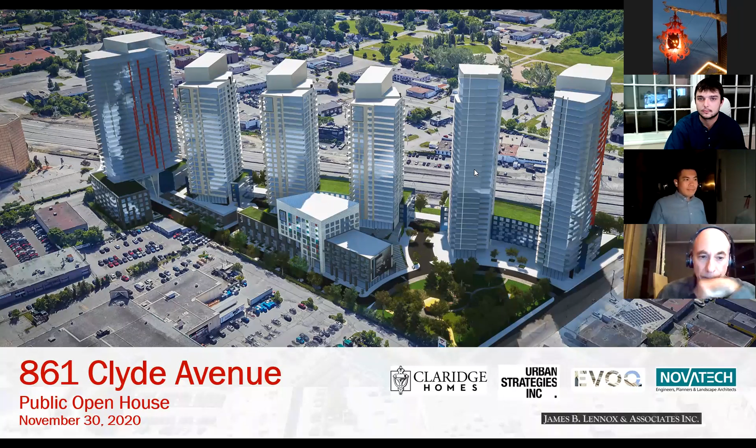Okay, I'll pick it up from there. Good evening, everyone, thanks for joining us tonight. I see about 52 participants, which is actually a great turnout for a meeting like this. We're talking about a site that's a little out of the way from where most people are living in Ottawa, so it's good people are interested to see what's being proposed for this pocket of the city, which to us from a planning perspective is really quite interesting.

It's a part of the city where we see quite a bit of change occurring over the coming decades. We think this project is going to be the first of many, and it's a bold plan for what we think is a pretty exciting, clearly a high-rise neighborhood. We're going to explain it to you in detail, but I want to spend a little time setting the context before a more detailed description by Nathan, the project architect.

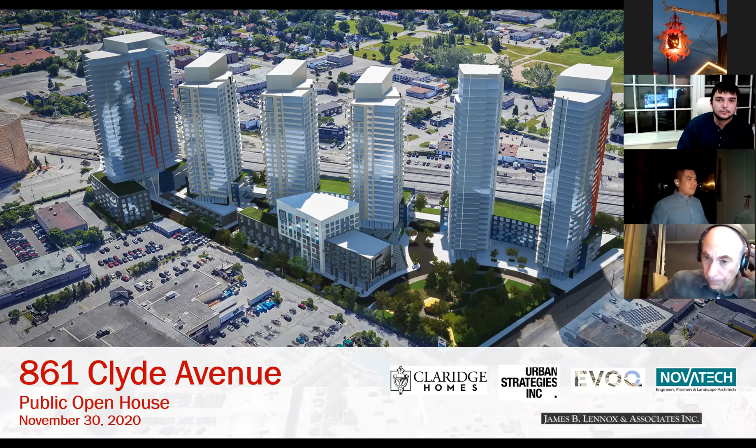Next slide, Barton. Here it comes. Just the agenda, and we need to correct this a little bit. We've already done the introductions and welcoming remarks from the councillor. So we're going to spend about 25 minutes taking you through the project, and then up to maybe an hour if you've got that many questions for us. We're booked for a full hour and a half tonight, so we'll stick around for at least that amount of time if there are that many questions and comments. So let's keep going with the presentation.

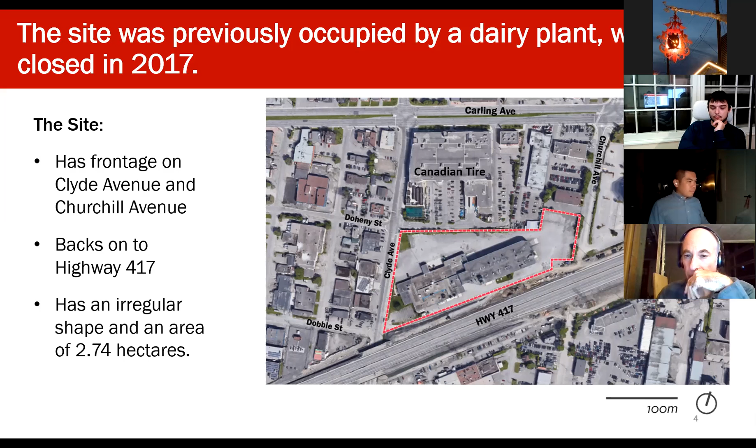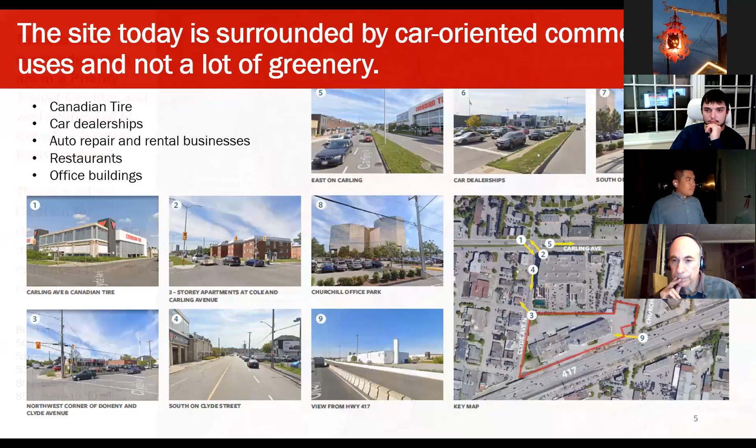On the north side of 417, we've got a whole mix of things going on. It's obviously the Canadian Tire and the office building I mentioned, a number of other car-oriented commercial uses, particularly on the west side of Clyde Avenue.

These are functioning businesses today that likely over time, with the ongoing growth of the city, a lot of that growth tended to happen through intensification. And Carling Avenue being such an important transit corridor in the city, we certainly see the area, our site and the area around it evolving and intensifying with redevelopment over time to become really an interesting, more transit-focused neighborhood within the sort of area that's really very well-established low-rise communities.

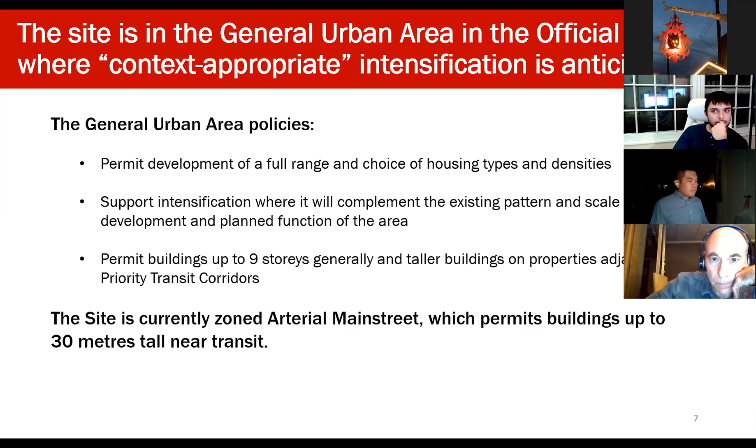The intensification proposed on the site is going to create a self-contained neighborhood that will set the stage for broader renewal on the surrounding lands, which will over time support even better transit on Carling Avenue and a better transit network overall, as well as bringing amenities that benefit the larger area.

So with that bit of setup on the policy side, let's move into describing our proposed master plan. This is a significant development, one that will build out over phases, and Nathan will describe those phases to you over many years.

It's a 6-tower development with additional mid-rise buildings. You might think it's all apartment buildings, but in fact, as Nathan will describe, it also includes some town housing development, and very importantly, significant open space improvements in the neighborhood.

A new neighborhood park right on Clyde Avenue will give the development an address and provide an amenity and gathering point for what we see as becoming a larger neighborhood over time. As well, a linear open space up against the 417.

We are required to set back our development from the 417 by 14 meters, so we thought it was a great opportunity to use that as a usable open space to provide a trail connection through there. It could be publicly accessible.

Nathan will take you through this in more detail, but we do have some interesting amenity spaces for the people that will be living in this community. With that overview, I'm going to turn it over to Nathan to go into more detail about the project.

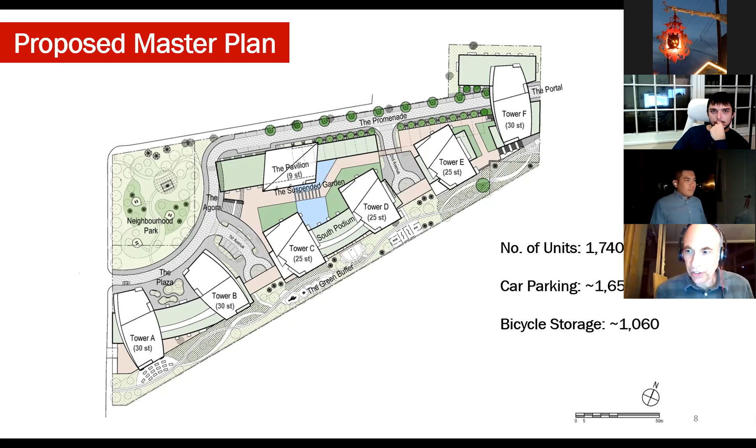Thanks, Tim. Yeah, this is the first I've spoken tonight, so can everyone hear me? Can someone just say yes or no? Yes. Okay, thank you.

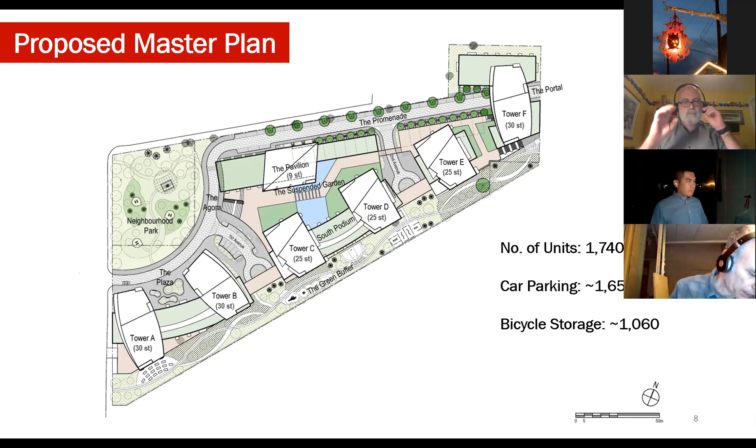There are several unifying elements that pull this whole project together. The first is the neighborhood park, which we positioned at the northwest corner of the site. The location was strategic, easily accessed by all residents of the neighborhood, this project and future neighborhoods, and it will allow the park to expand north if there are further developments.

The location of the park allows it, which is dedicated to the city as public park land, to offer a stage around which the entire project is developed and experienced. It becomes a main pedestrian access point, a focus of public open space, and it generates the orientation and form of the surrounding buildings. We've tried to use this park and the surrounding buildings to create a civic space that becomes the main gateway to this project.

The second unifying element that ties the project from east to west is what I refer to on this drawing as the promenade, the internal street that provides access to all the buildings. At the same time it offers natural connectivity with future developments. As we saw in Tim's diagram, the way the promenade is placed will provide good future access to future projects from the center of this very long block. It offers a movement and access spine for the entire project.

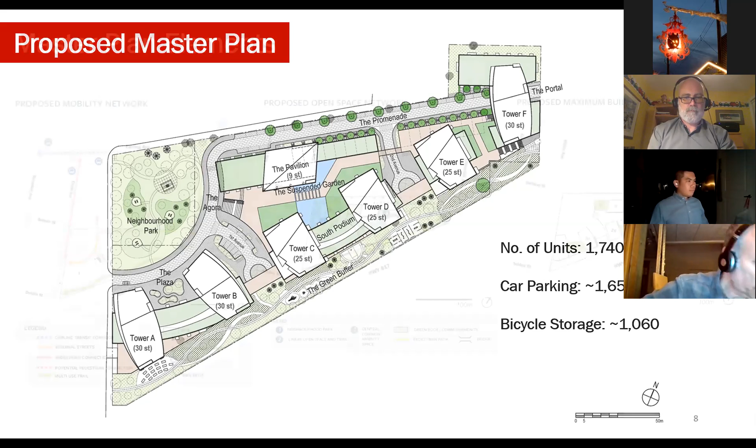It offers diverse experiences, grade level amenities and commercial spaces off it. We'll see in future slides that residential entrances, including townhomes and tower lobbies, will be there. We see it as a tree-lined 6-meter wide roadway. The Clyde entrance offers civic formality, the central section offers a residential street, and at the far end towards Churchill, a portal, which is the eastern gateway to the project.

The other continuous element is what we refer to as the South Podium, that curvy 6-story building that lines the south edge below the towers. It will all have the same treatment, with a wavy form. It faces what we refer to as the green buffer, the green strip between the highway and our project.

It offers a unifying vocabulary that knits the project together, and provides a sound and wind visual barrier to the northern part of the site. Its wavy form is intended to diffuse sound and offers a dynamic visual form when approached by motorists, so it's important visually from the highway perception of this project. The roofs of this space will be occupied as amenity space and will be landscaped.

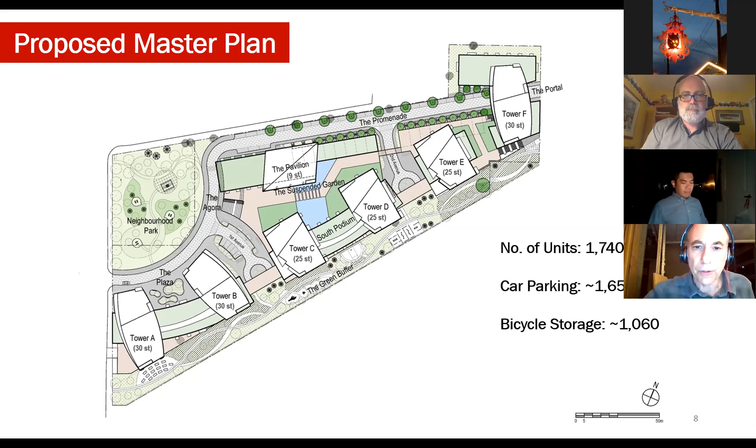This is a diagram that shows the networks of how this project was put together. The mobility indicates the main circulation, which will be shared vehicular, pedestrian, and bicycle. You can see it's accessed from both Clyde and Churchill, offering access through, and then it loops the park at the Clyde side of the project, becoming an important boulevard through the main civic gesture of the project, which is that open space at the corner.

The access to the interior parking structure, which is 3 stories below grade plus the first 2 stories facing the highway above grade, comes from secondary spur roads we'll refer to as avenues, which divide the project into 3 blocks. You see the orange lines that penetrate between the towers—that's where most people will access parking, so there won't be cars coming directly off that main shared road.

The open space network, the central diagram, shows number 1, the neighborhood park. Number 2, in the 14-meter band facing the highway, we're proposing this be heavily landscaped and very green. The lower 2 floors will be walls of the parking structure, which we see as ivy covered, and this space will be a recreation area with exercise spaces, amenities, and a bike path, part of a recreational network continuing east and west.

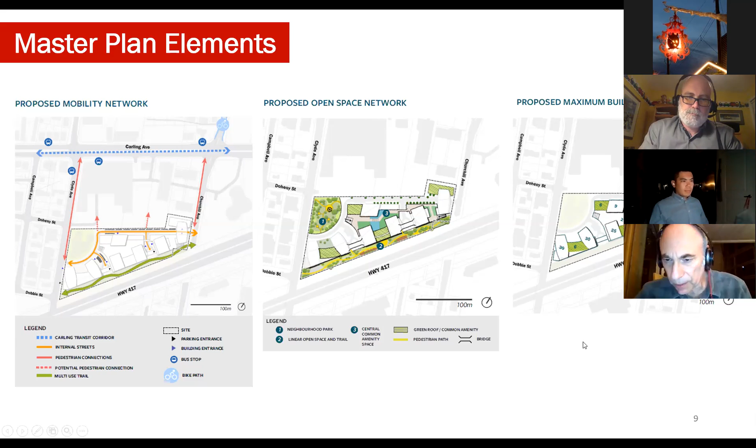The proposed maximum building heights diagram on the right shows what we are proposing in terms of building height. To summarize, we are proposing 30-story elliptical towers, 1 on the Churchill side, 2 on the Clyde side, which will be the pinnacles, iconic structures that indicate the east and west sides of the project.

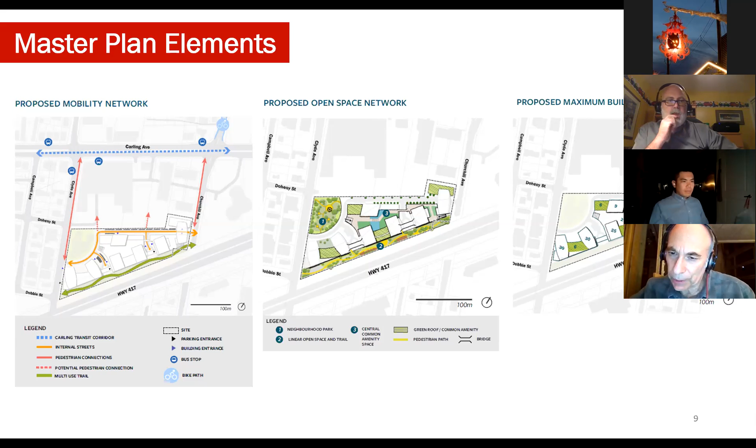3 towers that are more or less identical in the center at 25 floors, equally spaced. The podium structures at 6 floors, and then the mid-rise on the northern side of the project, ranging from 4 for the lowest part of it to 9 for the central trapezoidal form that you see there.

This central block and the block facing Churchill are built on 2-story podiums that have parking towards the highway, amenities on the other side, and the roof of that space we refer to as a suspended garden, which is an open amenity space accessible to the public as well.

There is going to be a pedestrian way of traveling right through the middle of this project, going through the park, going up onto that podium, and then walking through, crossing bridges, and coming down on the other side. This is part of the wealth of movement and spatial diversity that we're trying to create.

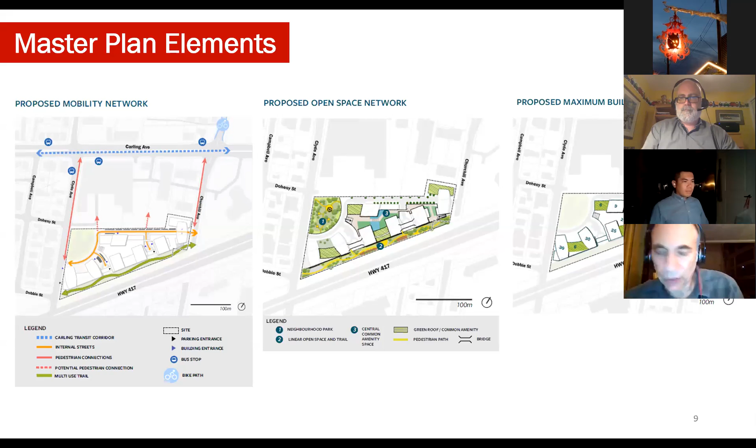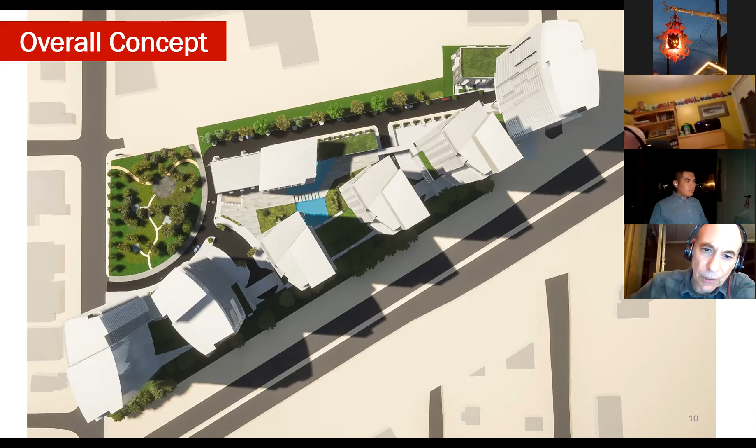We're looking at an aerial view. We can see a bit more clearly here because of the dark rendering of the roadway, where we have green, where we have garden. You can see that the project is divided into 3 zones, each rather distinctive. The first 2 towers facing the park on the Clyde side is 1 block, and then there's a central block on axis with the park that includes the 2 25-story towers and the mid-rise right in the center of the project.

And then the 2 towers on the east side of the project, the 25 in the middle and the 30 at the end, sitting right over that promenade, which forms the eastern gateway to the project, straddling 2 podium buildings at 6 stories. You can see the kind of quality we're trying to get for the suspended garden in the middle of the central block, in between the 2 high-rises and the mid-rise, and we'll see some views of that space coming up.

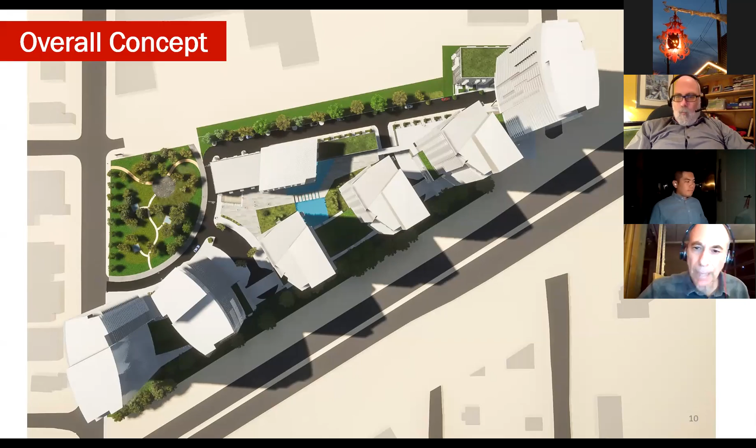Next slide, please. Here we see an aerial of the overall impression of the project as seen from the air, looking slightly from, I guess, the south—sorry, a little confused—southeast. We can see the 6 towers, as well as the green band separating the highway from the project, and the 6-story podium.

Okay, we're looking at the project now from the northwest. We can see the park in the center, and I'm going to start describing the different blocks. There are 3 separate blocks, as I mentioned before. The first block, the Clyde block, is the 2 30-story towers. We can see that the towers here are oriented with their axes on the rays of the circle defined by the park, so they really address the park. At their foot, and in between them, is an area we'll refer to as a plaza.

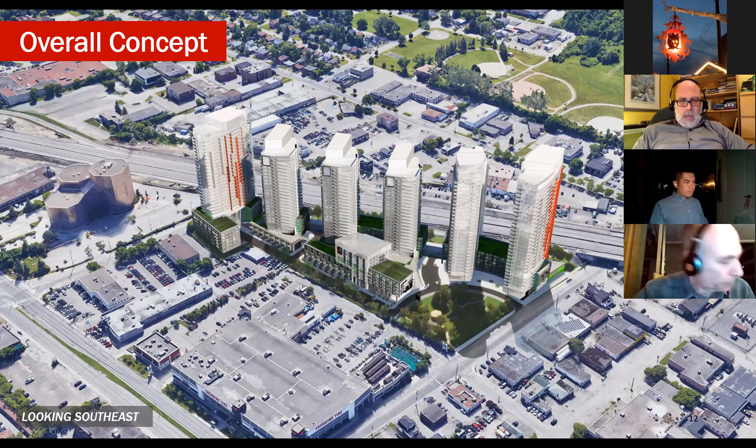So this is a view from the park. We can see how the buildings create a barrier so that the highway is gone as far as seeing it, and hopefully hearing it, is concerned from this area. So we've created a new environment, and you can start seeing how we have a very dense row of towers, then begin stepping down with buildings at different angles and different forms to create a diverse kind of midtown feel, a very urban midtown feel to this area.

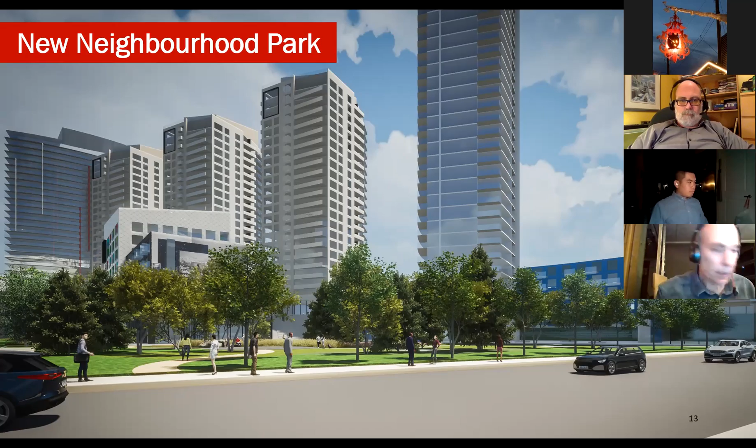We're looking from the park up to the mid-rise part of the middle block. Here we can see where we've introduced the bleachers, a public space facing the park, facing west. If you go up those stairs, you're on the 2nd floor podium, where you can walk between the buildings, which are designed to have a very diverse form, different shape, different materials, so again you feel you're in a bit of a dynamic space.

That large glass area you see below the face of the 6-story structure will be neighborhood amenities used by everyone in the entire project. You get to see the civic feel of the edge of the park, the sidewalk, and the promenade, which curves around the park, separated from the mid-rise block and the public spaces on the other side of the street. Again, we're trying to create a diverse, rich neighborhood with a lot of variety of space.

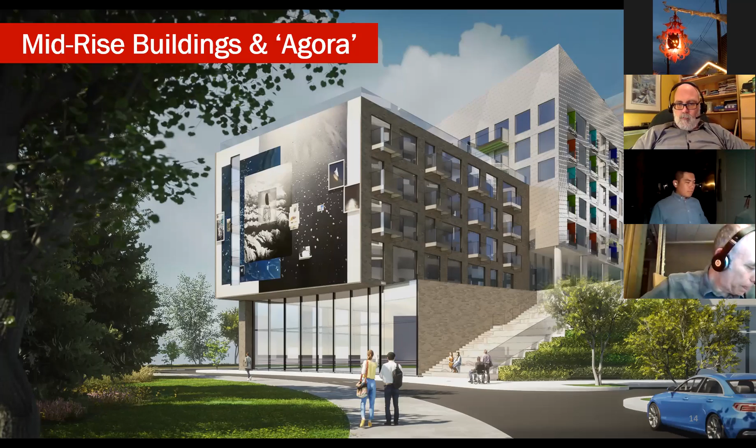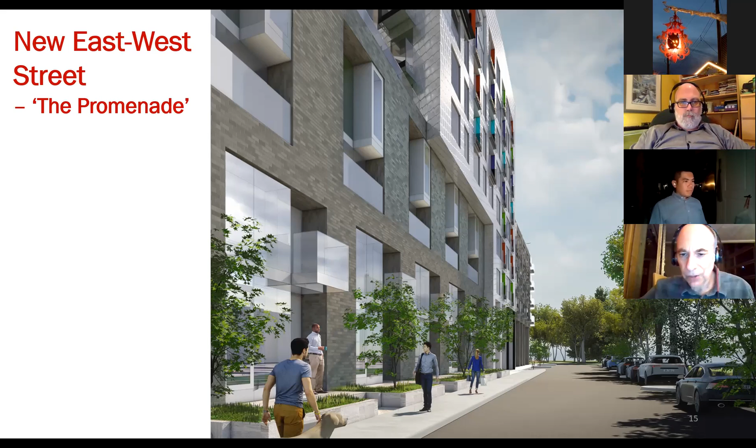You're looking at the promenade, looking back towards Clyde Street, and this is where it becomes more of a residential street. We're introducing 2 levels of townhouses at this level along the street, with individual residential entrances at grade with small private terraces. On the upper levels, the 3rd and 4th floors, there's another series of 2-story units accessed from a corridor facing the 2nd-story podium we discussed earlier, so they will have views both to the front and the back.

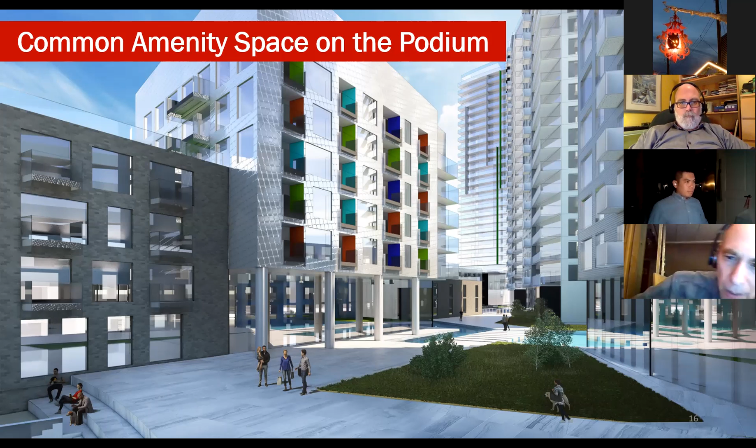This is an image from that suspended garden on the 2nd floor. Buildings with individual amenities, swimming pools, recreational gyms, facilities, and creative maker spaces will open onto it. There won't be private units facing this space because we'd like it to be semi-public. Between the tall buildings to the right and the smaller mid-rises to the left, we're creating an atmosphere that is intimate but somewhat civic, a place people might discover and go for a stroll, completely separate from the surrounding environment, offering something different and interesting.

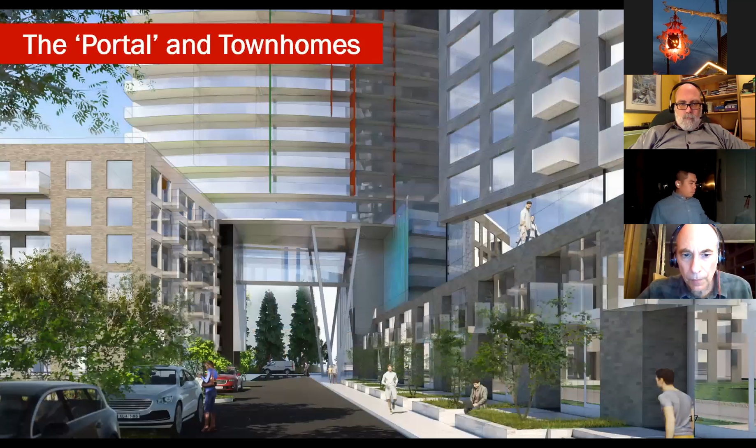Lastly, the final block we're going to discuss is the Churchill Block. Here we can see the main tower of the Churchill Block, which sits on 2 podium structures and straddles them. This creates a portal that is the end of the promenade, the eastern gateway to the project. If you're coming from Churchill, this would be the main access to the project from the other side. In future, perhaps future developments can pick up on this axis that's been created.

In this view, you can see how glass bridges connect the 2 parts of the podium underneath the tower, creating this volume of open space. The roofs of the townhomes on the south side will be extensions of the suspended garden in the central block. The whole network on the 2nd level is connected by bridges and stairways at both ends, so if you find your way up there, you can meander through and find your way back down, offering a multi-level urban experience.

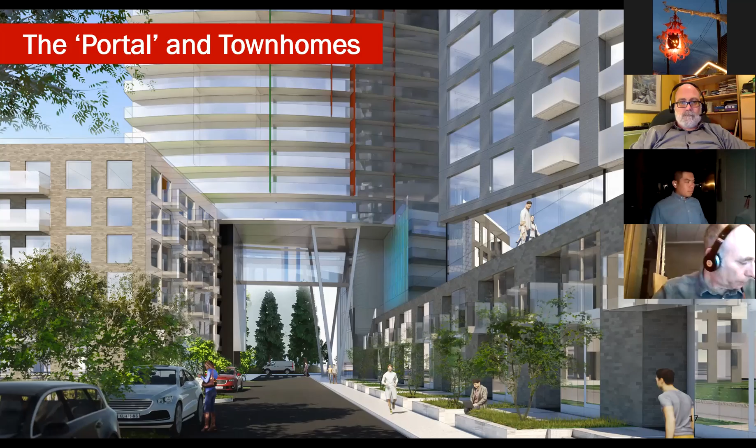Let's go back to the previous slide, because I want to quickly summarize the synthesis of what we attempt to do in the project. Because of the highway, the goal was to mitigate sound and impact, create an iconic architectural image as seen from the 417, create a softer image towards the north, and create a strong east-west architectural and circulation element tying the entire project together from Churchill to Clyde, encouraging leisurely movement through the project at multiple levels. We aimed to densify with a concentration towards the south of the site to create a transition towards a more neighborhood-scaled architecture on the north side, creating a variety of spatial, architectural, and movement qualities, distinct street experiences, different housing typologies, and using building and open space to create spaces of civic quality.

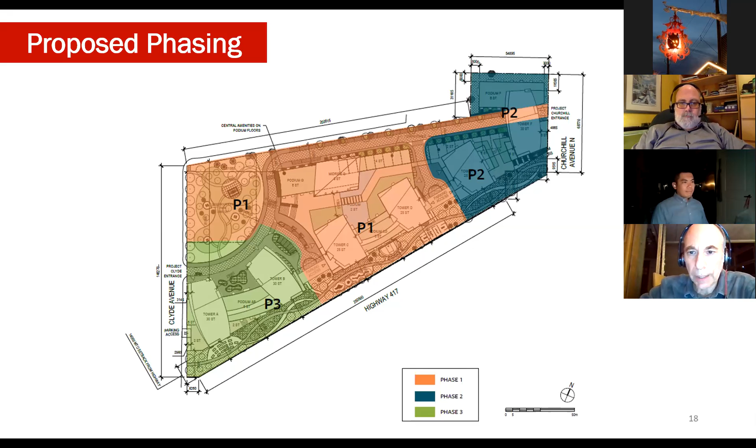So I'll go on to the next slide now and pass the microphone back to Tim.

Thanks, Nathan. I'm just going to wrap up with this last slide, which highlights what we see as the key benefits of the proposed development. As I mentioned earlier, this level of intensification will help support ongoing transit improvements, particularly along Carling Avenue, ultimately supporting the goal of getting rapid transit on Carling Avenue in time. It will also add new types of housing to the community, including a number of apartments as well as townhousing.

Within that mix of housing will be units of a great variety of sizes, from bachelor apartments to 3-bedroom units. There will be a conscious effort to ensure an adequate proportion of housing appropriate for families. We also recognize there'll be a need to include a significant amount of affordable housing, and that proportion and what it looks like will be worked out with the city through the review period.

We're adding, as was made clear in Nathan's description, a significant amount of green space to the area, both in the form of the neighborhood park and the landscaped open space along the south edge of the site. With that open space, as well as the promenade street running through the site, there are opportunities for pedestrians and cyclists to cut across this block between Churchill and Clyde, which will help connectivity, particularly from the cycle tracks along Churchill across the site down to Carling View Park and the trail through the experimental farm.

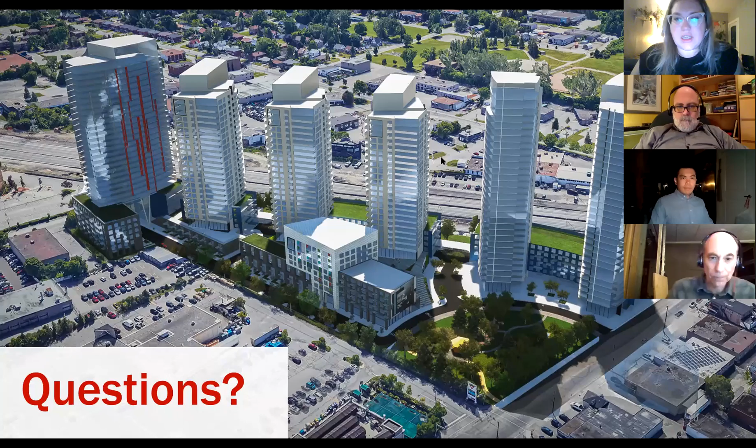On that note, I think in one of the first slides somebody was asking which way is north relative to the Ottawa River. Maybe we can go back to one of the first slides and point out where north is.

Actually, you can see in this image here, looking to the northwest, the Ottawa River in the background there.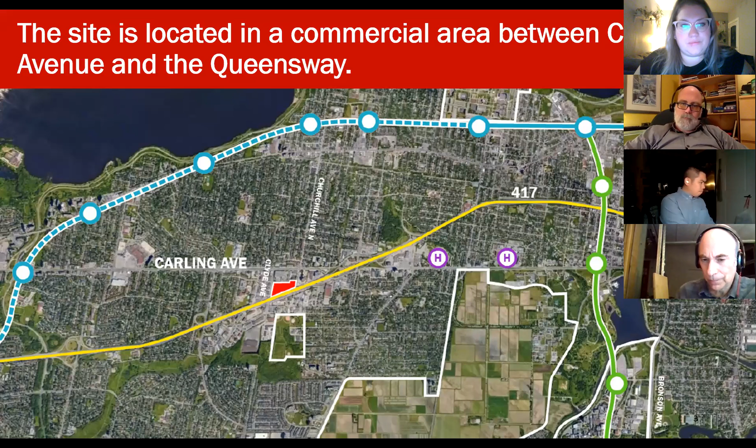A comment, I think, more than anything: not a lot of greenery. Carlington Woods is within a 10-minute walk, so I think that was in response to something said in the presentation, and I'm sure they've noted that. Yes, we do acknowledge that. Sorry, we weren't speaking about the immediate surroundings - we talked about the lack of greenery on the north side of the 417. We certainly acknowledge there's a richness of green space to the south of us, which is certainly going to be an asset for this area as it evolves over time.

Is it possible to share the presentation with us? We're recording this and we're going to put it on YouTube, but can you folks share this presentation with us and we can email it to people? Absolutely, we'll get you a PDF of this right after the meeting. Perfect, thank you, and I assume a lot of this will be on the DevApps site at some point as well.

What is the expected impact on local residents like traffic, property taxes, real estate values, parking? Well, that's a big question with lots in it, and I'm not sure we can give full answers to all components of it.

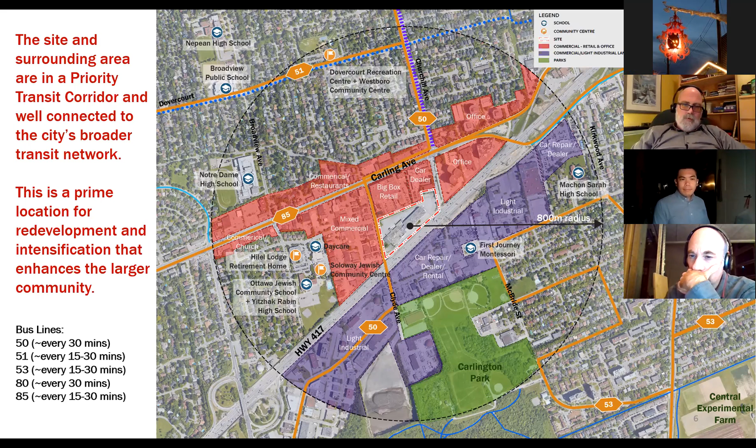Just on traffic, we do have Brad here from Novatech. The traffic impact assessment is still underway - it's a staged approach we take, working with city staff to make sure all our assumptions are aligned in terms of background information that feeds into that. That will be forthcoming fairly soon, I think in the next couple of weeks or so, so we'll have more detailed information there.

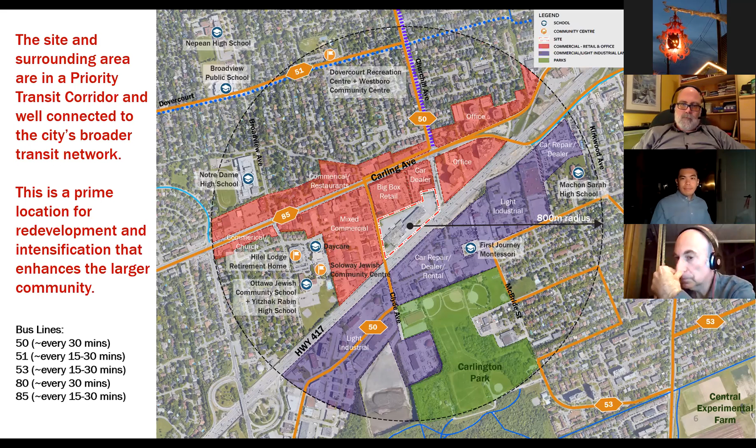I'll just make one observation around traffic impacts, even though we can't give specifics at the moment, and Brad can correct me or add to this. As we pointed out, this is a commercial pocket of the city today, so you have traffic generated by the Canadian Tire and the office buildings to the east - those are destinations bringing traffic into the area. For the most part, our development would be creating traffic that's going out, in the opposite direction. So to the extent there might be some congestion in the area today, and I don't think there's a great deal of it, we're not going to be adding to that, at least not in the same direction much of that traffic is headed.

We also have signalized intersections both at Churchill and Clyde along Carling, so those controlled access points ensure that traffic to and from the site can be fairly well managed. Brad, I'm not sure if you want to add anything else beyond those comments.

Yeah, where we are, we're working through the city's traffic impact assessment process. We're currently at step 3, awaiting sign-off on our traffic forecasting prior to finalizing the final TIA for submission. We're hoping to have something in next week, and once we submit it, it'll be available on the city's development application website for review and comment.

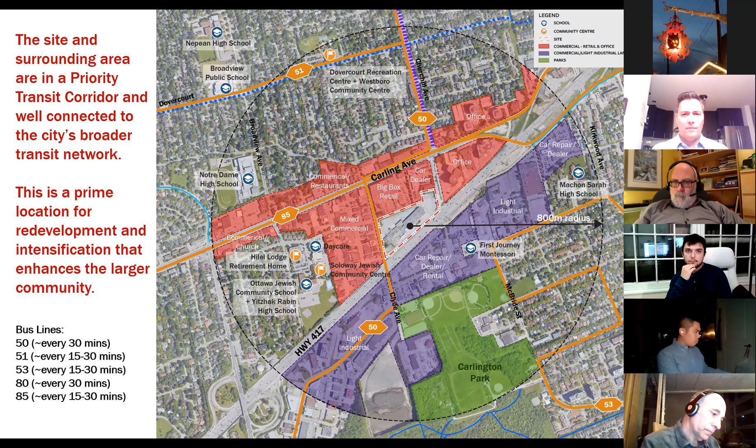Thank you. Are these condos or rentals? I think—and Vince, you can jump in here—it's not been determined yet, but there's an expectation of a mix of condo and rental, though the details haven't been worked out.

Vincent, do you want to add to that? Yeah, we haven't figured that one out yet, but I'd expect it to be a mix of both for sure. Okay, thank you.

Who exactly is the barrier from the highway serving? The residents who live across Carling Ave from the Canadian Tire store? I think what you're referring to is when Nathan talked about the towers creating a kind of barrier, a buffer against the 417. Yes, that would really be for all, both existing and future residents and businesses, to the north of our site.

Effectively creating a kind of buffer there so there's going to be some mitigation of noise, and certainly the view will change for anyone to the north of our site. That's what was meant. Okay, thank you.

If there's about 1,600 cars anticipated at max capacity, what kind of impact would there be on local traffic patterns? Or is this coming up later in the presentation? Well, I think we touched a little on this related to the previous question—we don't have details yet in terms of what the precise impacts will be.

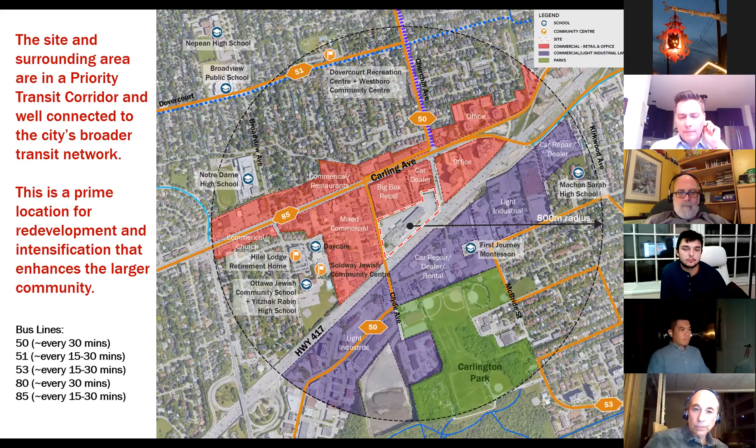I would just comment that, and Nathan can speak to this too, that we did consciously set out to create a landmark development. We think the height and the density that goes with it is appropriate for this area, given its location in the city, given its proximity to transit and the opportunity to create a unique neighborhood within the broader neighborhood. So we understand when you have 30-story towers, you are going to change views. The key question is how significantly are you going to change those views, and how important are those views to begin with. We understand that folks living in this area might consider this to have a significant impact, but we'll have to look at it from all perspectives to really consider how significant that change is and weigh that against what we consider to be the many benefits of the project at this height.

Nathan, I'm not sure if you have anything you want to add. No, not much, except that we have attempted to maximize as much as we can the space in between the buildings by turning them so that their wider side is facing each other, as opposed to creating more of a built wall. But yes, this is something that has to be looked at with full context and understanding of the views from the neighborhoods and what this will be changing.

Sorry, I was muted. Okay, this looks pretty funky at first blush, but I want to know what sustainable building standards you plan to use and what renewable energy systems you're considering. How, from the city's point of view, does this development fit within the overall goals and vision of the recently passed Energy Evolution plan?

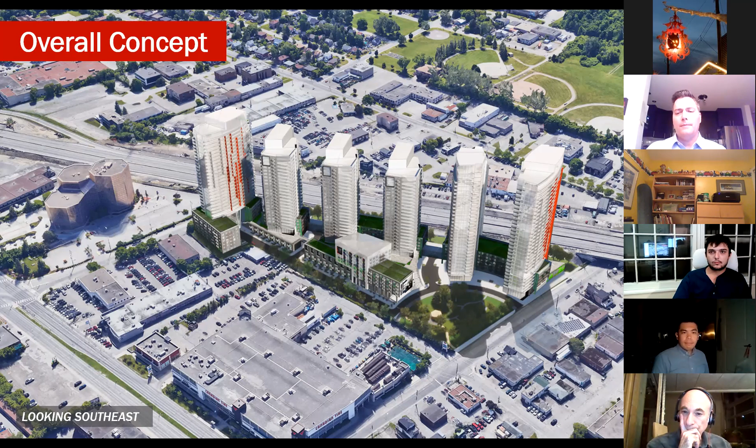So this is something Brad will be looking at through his work, to focus on trips generated based not simply on the parking supply, but on what we assume the modal split will be. Given the proximity to good transit, as I mentioned earlier, we'd assume there will be high transit usage. Yes, there'll be cars, people driving, but it certainly won't be every car that's parked on the site. And the parking ratios, anyway, will be discussed throughout the approval process.

Fiona, can I jump in there? I don't want to speak for Jeff. This is Riley Brockington speaking, the councillor in River Ward. If Claridge is trying to offer parking to match what the zoning bylaw requires, then Councillor Leiper and I are willing to have a conversation with you on lowering the number of parking spots. But if I heard correctly from Mr. Smith, there are market forces demanding that parking. Certainly we want to contribute and encourage as much active transportation and public transit use as possible.

And certainly in the southern end of River Ward, we see large legacy apartment buildings with seas of empty parking because people don't have a car, certainly not to the same ratio as when these apartments were built. So I don't know what your more recent experience is with parking demand, but if you know you're not going to need 1,650 parking spots, I'm sure the local councillor and I would be willing to talk to you about how we can go towards less than 1,650. I just wanted to make sure you're aware of our intent and support for fewer spots.

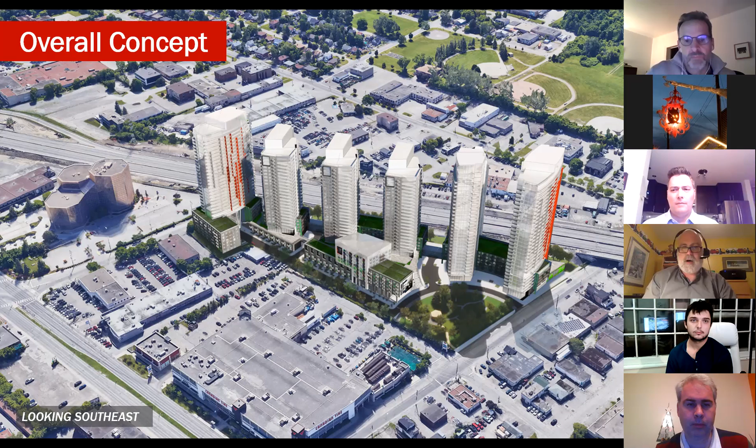No one has built rental housing for years. With a 1.8% vacancy rate, which is half of what it needs to be to be healthy, rents are absolutely astronomical. In most of our ward, a one-bedroom apartment is costing close to $2,000 a month to live in a ward like Kitchissippi. What's interesting about this development is being able to offer a significant new amount of rental stock that won't be luxury, and that will help bring rental prices down as we add more inventory. That's the only way we're going to truly address the market affordability crisis.

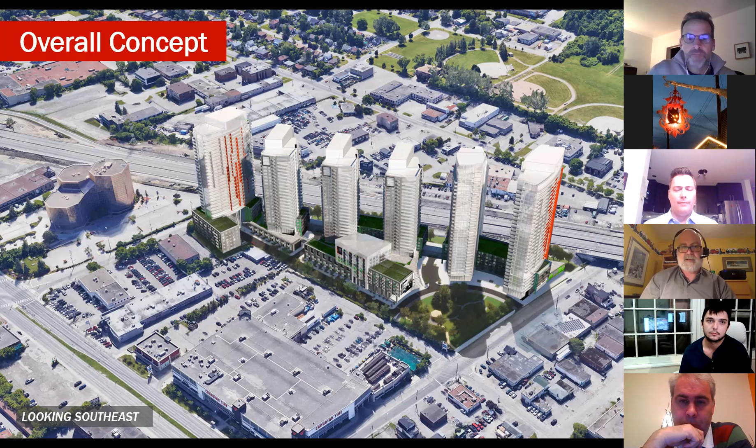We have a lot of work to do at the city to create deeply affordable housing for people who will never be able to afford housing at market prices. But adding more housing is critical to addressing the rental crisis we have. And as we add that rental housing, it needs to be in places like this where people have a viable option to live car-free, or at least significantly reduce the amount of driving they do every year. That is critical in order for us to achieve our climate change objectives.

So yes, the resident is right, I'm a fan of intensification. I vote against a lot of it a lot of the time because I think it has to be thoughtful, but in this case, certainly I am supportive of the intensification of this location. I'll leave it there.

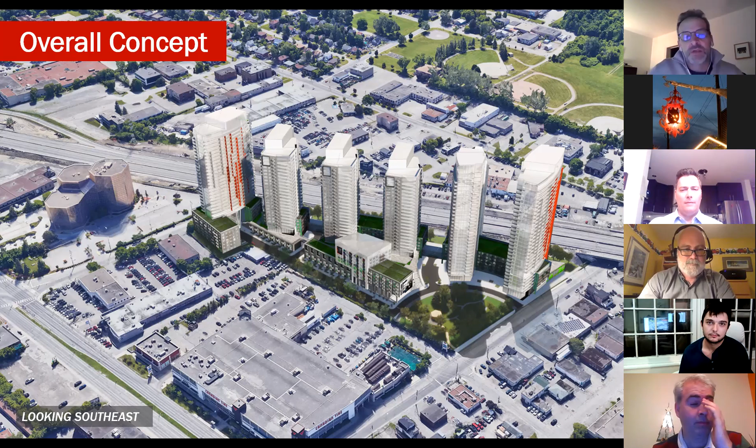I think they won't be able to widen it. Yeah, exactly, the MTO is actually very careful in planning its highway corridors such as this, and one of the reasons for the 14-meter setback is to protect for some limited widening. Apparently, I don't think there's the expectation on the MTO's part or anyone's that this highway will be widened any further, but there is some protection for that if required.

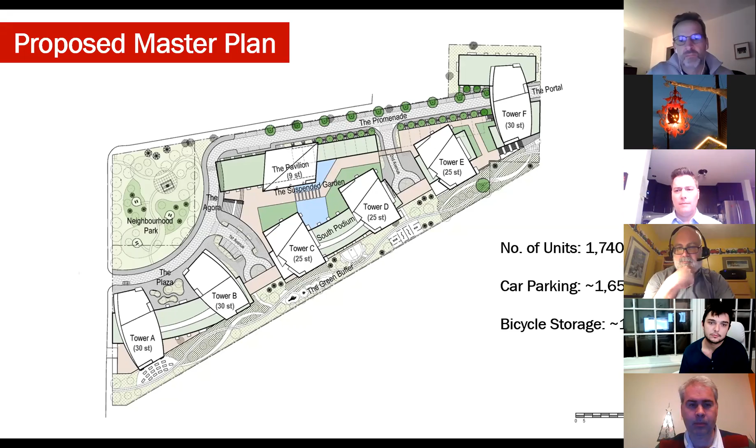Yeah, I think that's all we have to say on that. Can we just jump in on the overall view, because there's another aspect to the question. In case there is any confusion, the 14 meters is not a reserve for future widening. There's already an additional 9 or 10 meters from the current edge of the embankment to the property line.

So in fact there's already a buffer there in the hopefully unlikely notion that the highway would ever need to be widened in this day and age. So that 14 meters right now is not left as a barrier for expansion, it's more of a security barrier, and there already is a buffer on the north side of the 417 for a future widening, should they decide to do it, without actually affecting our 14-meter buffer.

Thank you, Nathan, you are correct. Actually, the MTO says the 14 meters might be in case they ever need the road, but the reality is it's mainly for safety, so you're absolutely correct.

I would just say it cost them $100 million to do this most recent phase of widening, and I hope that the residents in the West End, who are supposed to be the beneficiaries of this, when they see that their commutes five or six years from now are not in fact any faster than they are today, I hope that they will join those of us who are seeking to not allow the Queensway to be widened again.

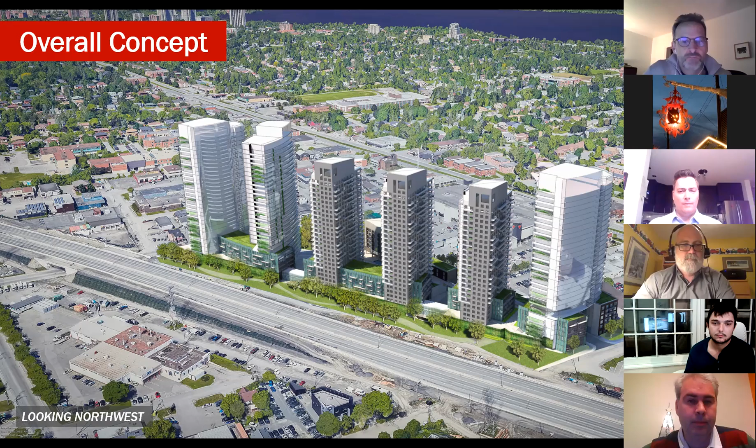You know, you'd think we would have learned. Every time we widen the highway, it costs us tens and hundreds of millions of dollars, and somehow the commutes just keep getting worse. We need to make sure that we're putting the investment of tax dollars into public transit as the only sustainable way to move people around in our city.